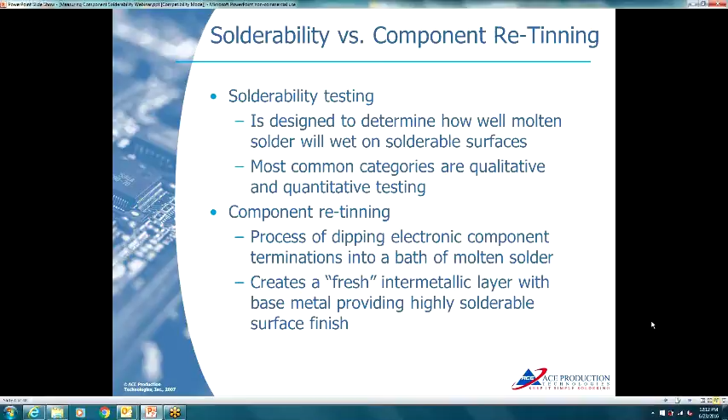Component retinning, however, is not the same as testing. It is the process of dipping electronic component terminations in a bath of molten solder. In addition to providing a fresh intermetallic layer of new virgin solder over the base metal, it removes oxides, removes gold, and provides a highly solderable surface. So they're two different issues.

So again, people ask, what is solderability testing? It is not component preconditioning. We've seen cases where people buy a solderability tester and attempt to use it for component reconditioning or tinning. That is not the case - you wouldn't do it because it has a single static solder pot. Anything you remove, oxides, contaminants, gold, etc., stays within that solder, and it's not flowing. It's a static pot, so it's not recommended for component conditioning.

Solderability testing is a measure of the ease at which a solder joint can be formed. It's primarily used to assess the solderability of device package terminations. For example, if you're getting a component from 2 or 3 different vendors, it's a good idea to do periodic testing during qualification to determine which vendor is shipping you the most highly solderable components.

Solderability for a given component will vary depending on the type of solder alloy you use. For example, solderability with lead-free alloys, whether SAC 305 or SN100, differs significantly from solderability when using lead-based alloys, because lead, even though it's a bad material, tends to wet very easily.

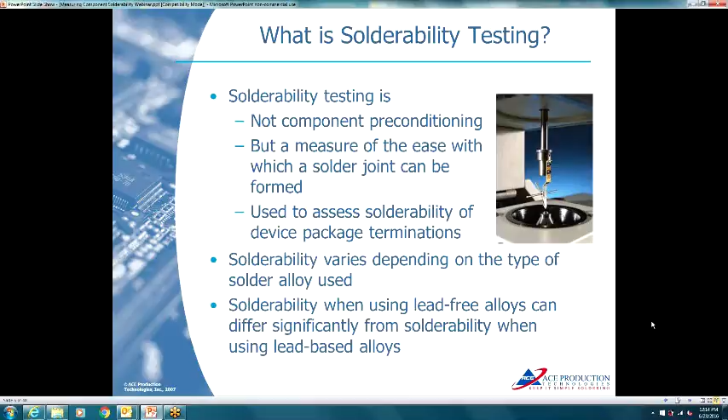There are primarily two different solderability test methods: the dip and look method and the wetting balance method. We had questions in the first session today about which one is better. The answer is they're two different things for two different purposes. The dip and look method is a qualitative type - it's subjective versus comparative analysis. We'll show you some examples in upcoming slides.

There are 2 suppliers of dip and look test equipment. Wetting balance is a quantitative type test where you have a test instrument that gives you a plot, and a human being interprets that plot, much like an X-ray. You have a beautiful 2D X-ray system that gives you a great image, controlling kilovolts, power, and oblique angle view, but it comes down to a human being interpreting that image, or in this case, interpreting the curve.

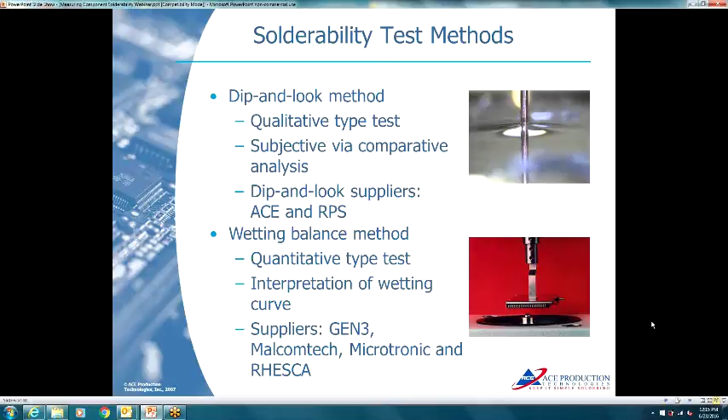There are several suppliers of wetting balance systems - we'll talk about it later. There's a place for both of them.

For solderability testing, you can use steam aging for accelerated life testing. If you want to simulate, for example, what happens if you keep parts on the shelf for 5 years or longer, it's a good idea to use steam age testing. It simulates accelerated life - we've seen people with components sitting on the shelf as long as 15 years for end-of-life builds, so the concern there is the degree of oxidation.

The dip and look method, as mentioned earlier, is subjective via comparative analysis. But let's talk about the difference between dip and look and wetting balance. Dip and look testers are typically lower in cost, about 15 to 16K. They're relatively fast and easy to do. It is subjective, but it can be done on the shop floor by shop floor personnel.

So it's something like doing an AQL. If you want to do a quick test on your production, a dip and look method is great for that. The wetting balance tester provides a much more precise test.

It measures the wetting forces between the molten solder and the test specimen as a function of time. Cost is a little more, about 55 to 60K, and it needs a skilled technician to do it in the lab environment. It takes maybe about 45 minutes or so to really do a good wetting balance test, so it's not something you're going to do out on the shop floor.

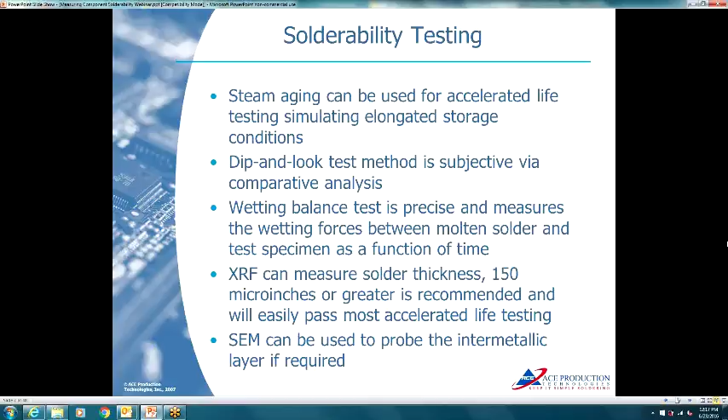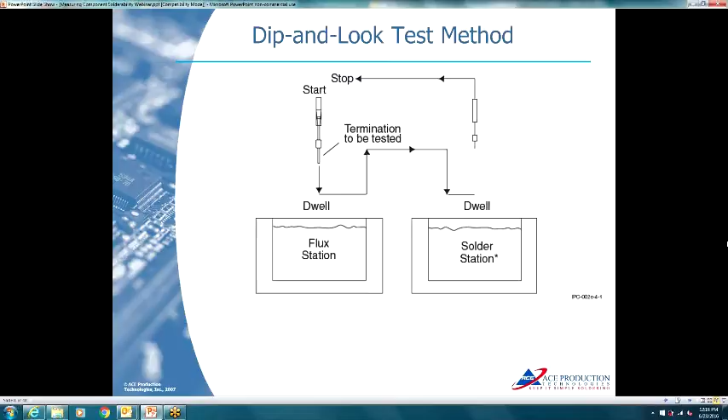This is how a dip and look test method functions. You basically take a specimen, and it's dipped into flux for a predetermined dwell time and immersion depth, and then you dip it into a molten solder bath, again for a predetermined dwell and immersion depth. After the specimen comes out, a human being looks at it.

It's a subjective test. The images on the left show the two that they accept - that's a condition where the solder has wetted at least 95% of, in this case, a .025 diameter pin, under 10x magnification. So you dip the part in the molten solder, and then the human being looks at whether it has 95% coverage.

The two images on the far left show more pinholes, and they're a reject because there's less than 95% coverage. So it's a subjective test, but it's very quick. You can do it very quickly on the shop floor, and basically shop floor personnel can do it.

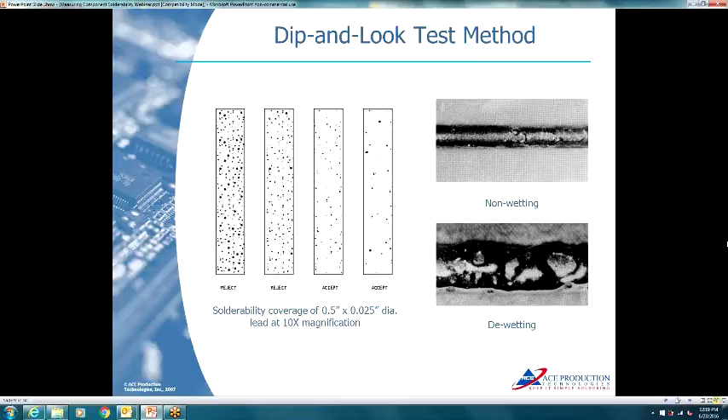You can also use 20 or 40x magnification, those images on the right. You can easily see non-wetting or de-wetted conditions. It's easier to do it here than after you build a circuit board or you're trying to solder a part that just won't solder and you're struggling with it. It's easier to determine if it's acceptable or not before you assemble a board.

The wetting balance test method is different in that, as we said, it's a little more complex to run, but it gives you a very precise reading.

The way it works is you dip a component in flux. The component is then attached to a device on a load cell, and the component is lowered into molten solder. What you're doing is measuring the buoyancy of the device - in other words, measuring the speed at which the solder meniscus climbs upward or flows on the body of the termination. Basically, the better the solderability, the faster it will rise up - the solder meniscus will rise up on the termination.

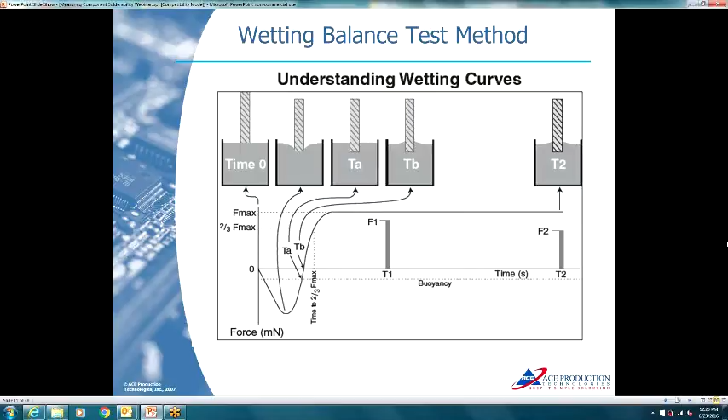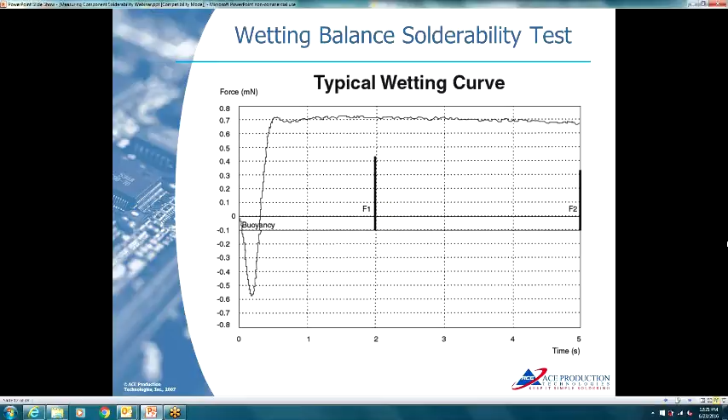Here's an example of using a wetting balance test to measure the difference before and after retinning. In other words, why do you need to tin parts? Parts are retinned for a variety of reasons: to remove oxides, to remove contaminants, to remove the gold. This was an actual case where it was a specialized component and the client could not solder in the circuit board. I don't know if it was hand soldered or machine soldered, they just couldn't get it to solder.

And it was from an offshore supplier, and the pins of the part were tested. You see in blue that plot was done before retinning, and you can see that it was very slow. The meniscus rose very slowly, very slowly to get back up to neutral buoyancy. That was a slow wetting curve, basically a slow or retarded wetting situation. That would be a case where it would be very difficult to solder that part in the board, if at all.

That component, we took I think it was 10 or 20 samples, retinned them, basically stripped off the original plating or tinning that came from the component supplier, put a new fresh coat of solder on, and did a second wetting balance test. You can see the line in black, the meniscus rose very quickly. You can see the before and after difference, the advantage of retinning a part as far as solderability.

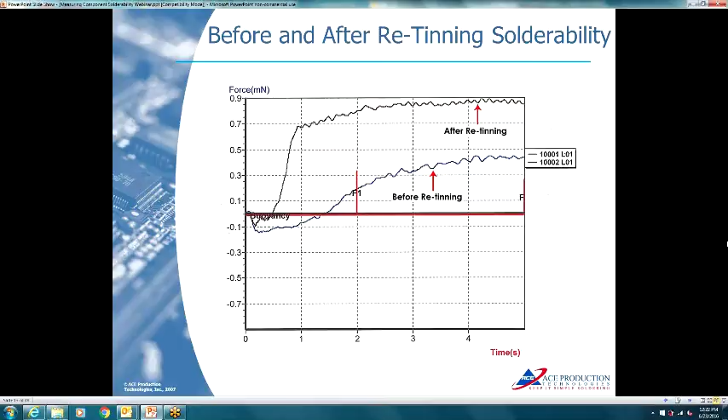There are several solderability test methods, however the MIL standard 883 and the J standard 002 are the most common. There are others, some may apply to you, some may not, but the top two are the most common in use.

What's the motivation behind lead tinning or retinning? It's really improved reliability. With the new REV-F, there is a big need to do removal of gold plating, sometimes referred to as gold washing, to remove the gold. Also for tin whisker mitigation, which is a major concern for military or aerospace manufacturers. The other advantage of retinning or lead tinning is enhanced solderability, producing a homogeneous intermetallic layer with the base metal or the component lead or termination.

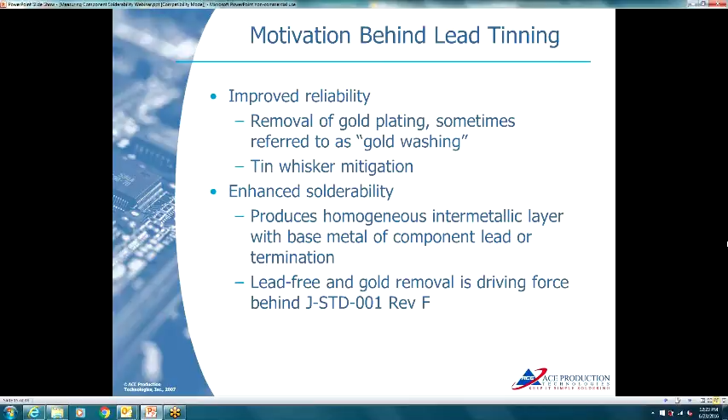If you look at it, what was the driving force behind the change from REV-E to F? It was lead-free and gold removal, and we'll show you some other slides coming up.

Tin whiskers, I'm not going to dwell on it a long time, but it's well known that tin whisker growth is predominantly outward from the plated surfaces. That's why tin plating is typically not good in certain harsh environments. Tin whiskers can and do cause short circuits and arcing.

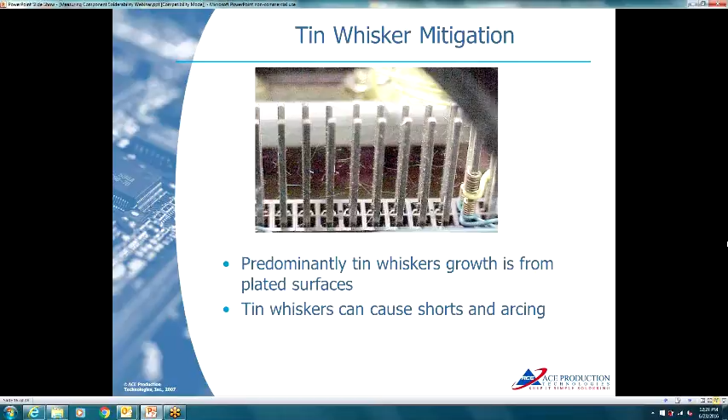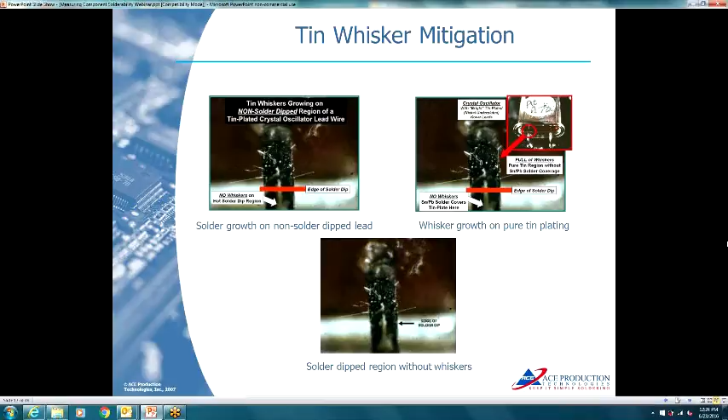Here's some graphic difference on a crystal oscillator. It's a little hard to tell, but if you look at the red horizontal line, these parts were retinned. Below the line is where they were retinned, and you can see no tin whiskers, and you can see tin whisker growth above it where they were not immersed. The pin was not immersed in solder. You can see it a little bit better on the bottom image, that once you solder dip, remove the tin plating and replace it with a homogeneous tin lead plating, you can see there is no growth of tin whiskers.

As we mentioned, gold embrittlement, gold removal is a very hot topic now, especially because of the new REV-F with the J standard 001. Gold plating has been used a long time in the industry because it protects device termination through the harsh, high reliability qualification process. However, the issue is gold in a solder joint can create gold embrittlement.

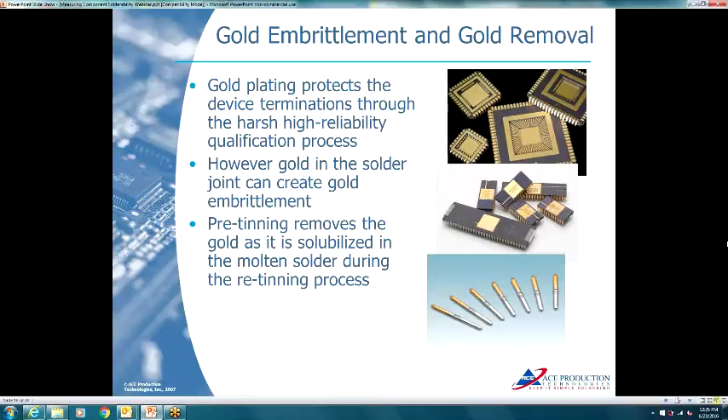Pre-tinning or retinning removes gold as it's solubilized in the molten solder of the first of two solder pots. In other words, it's removed in the first pot, and then the component or the termination is retinned in the second pot. We'll show you that in another slide coming up.

So why is gold used in the first place? Well, immersion gold over a copper base metal is highly resistant to the effects of corrosion. Gold is not oxidized and provides a very good protective layer over base metal.

It provides a highly solderable surface, and the reason device manufacturers like it, the gold provides a very bondable surface for both gold and aluminum wire bonding. However, the inclusion of gold in a solder joint can result in gold embrittlement because that gold is going to be combined with other metals within that solder joint. So it's good for bonding and assembling the device, but when you get to the circuit board level, excessive amount of gold is not a good thing to have.

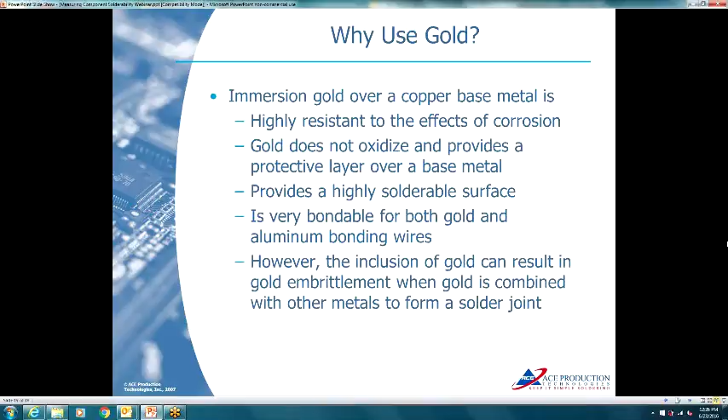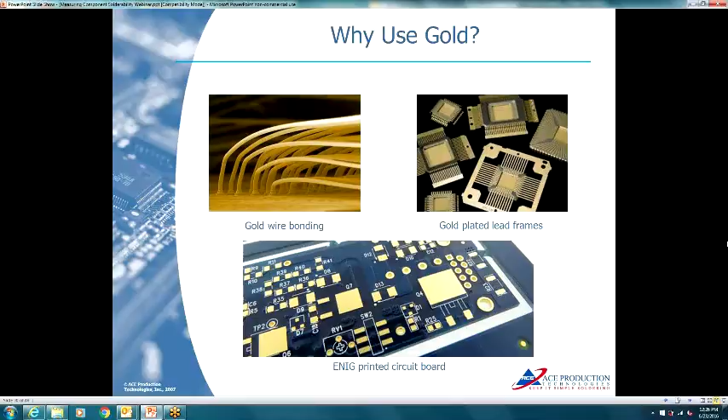So here again is some other examples of why gold is being used. It's very good for gold wire bonding, gold-plated lead frames, and we see gold in plating boards. So that's nice, but we have to remember that once we get to the pinout stage, where we're assembling the board, assembling the device on the circuit board, gold has to be controlled to stay below a certain level.

So gold embrittlement has been known to be a failure mechanism in tin lead for some time. Again, it's the amount of gold that is a concern, and that amount of gold comes from a variety of sources.

You can be concerned if you have ENIG boards, depending on the amount of electroless nickel immersion gold. That gold is a contributing factor to gold amount. Studies have shown that SAC 305 tends to maintain its proper mechanical properties a little bit better than tin-lead, primarily because of the additional tin content. However, SAC 305 solder joints do degrade with increased gold content.

There have been all sorts of independent studies done, and the key question is what's the threshold, the maximum amount of gold? As we said, there does not appear to be a threshold - it's acceptable, unacceptable, good and bad. There's been a debate within the industry: is 3% gold by weight the limit? Is it 5%? The agreed-upon decision was 3% gold by weight as the maximum level within a solder joint. However, some people have seen gold embrittlement with gold levels as low as 1 or 2%. So it's a topic of high debate.

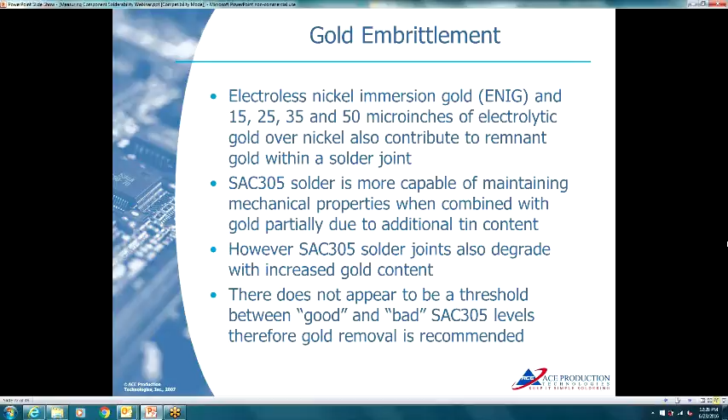You want to stay below 5% gold by weight, and as device pitch gets smaller and smaller, those solder joints get smaller and smaller, the amount of gold is going to increase because the total volume of the solder joint is decreased.

What's the reason behind gold removal? For high-rel applications, solderability is no longer an option for many high-rel segments - not only Class 3, not only military, aerospace, or wellhead electronics, but also Class 2. With the implementation of the new Rev F of J Standard 001, solderability testing, gold removal, and component retinning have become prerequisites for doing business in the global marketplace. It's becoming more and more known.

As we've found going across the industry - not trying to categorize everybody into one or two groups, but we've seen quite a few companies that fall into these categories - many manufacturers of commercial electronics feel that Class 2 products aren't affected by Rev F of J Standard 001. They don't realize that the new Rev F does affect them, and therefore don't realize the reason for gold removal. People are becoming more aware of that. I believe Rev F was issued about a year and a half ago, and it's now just starting to become more in the forefront.

People in the military aerospace industry - many are doing things correctly. However, traveling around the country, we've seen many in the military aerospace industry that are still living in the 80s, relying on MIL 883 and unaware of the newer standard. We've seen many military aerospace OEMs still using single or static solder pots, dipping parts with tweezers. That's not a good way - you are not doing gold removal, you're relieving those gold material contaminants and oxides into that pot for the next time you apply solder. We'll show you other slides on that.

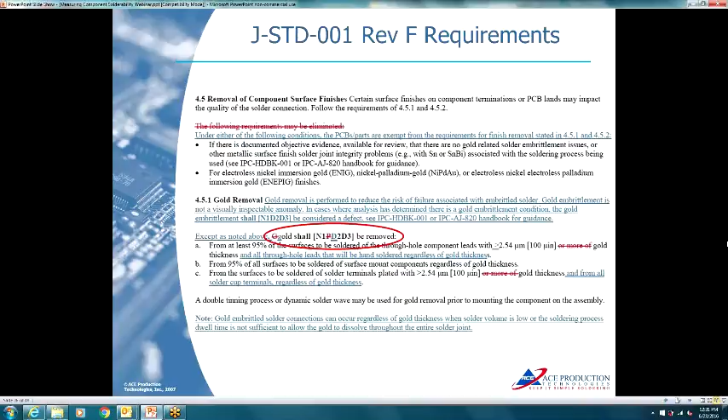This is an excerpt right from the IPC standard that was issued in 2014, and these are just the defect codes. N is no requirement, not applicable. A is acceptable. P is process indicator. D is defect. You'll notice in the examples it varies depending on if it's Class 1, Class 2, or Class 3. What many people sort of glossed over was that with Rev F, gold removal is not applicable to Class 1, but it formerly was a process indicator for Class 2 products - it's now a defect for Class 2. It always was a defect for Class 3. So the point is gold removal does now affect Class 2 products as well.

The J Standard 001 Rev F basically states that at least 90% gold should be removed from at least 95% of surfaces on all components that have more than 100 microinches of gold thickness. You have to remove gold from 95% of the surfaces on all surface mount parts, regardless of gold thickness. You may ask yourself, how do you remove 95% of gold? The answer is you remove it all - you dip it and remove all of the gold. Some people debate whether you have 100 microinches, whether you have 80, whether you have 120.

On surface mount, you have to remove gold on all components, regardless of thickness. On through hole, there's a debate whether you want to follow the spec, which says anything more than 100 microinches. We're seeing people removing it on all through hole regardless of thickness as well. You should remove it on all solder terminations, again anything more than 100 microinches. A double tinning process or dynamic solder wave is required to remove gold, and we'll show you that in a couple of upcoming slides. Improper gold removal on leads and terminations prior to assembly can lead to solder cracks or failures.

For those of you doing end-of-life builds, we've seen customers who have legacy parts that have been sitting on the shelf up to 15 years. A lot of those are obsolete parts that come through distribution, and they are very heavily oxidized. They have to be retinned just to remove the amount of oxides, not necessarily for gold removal, but because they are so heavily oxidized and result in sunken solder joints, non-wetting, de-wetting.

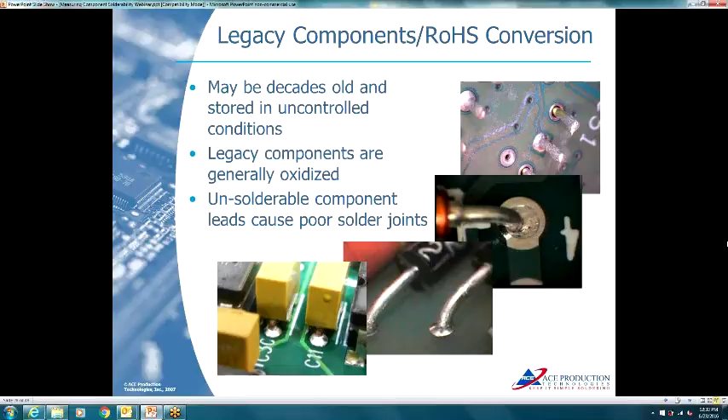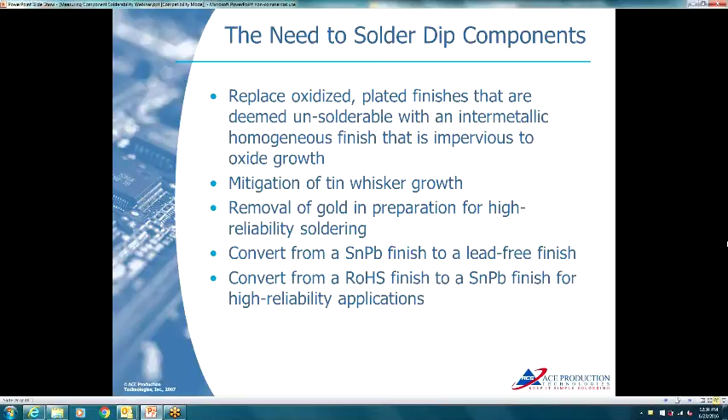So again, the need to solder dip components: you want to replace oxidized, heavily oxidized plated finishes that are unsolderable with an intermetallic homogeneous finish that's going to be impervious to oxide growth. You want to eliminate or mitigate tin whiskers. You want to remove gold in preparation for high rel soldering, and you can argue that it's high rel in class 2. You can also solder dip components to convert a tin lead to a lead free. We're not seeing a lot of people doing that, but it can be done. We are seeing quite a few people convert RoHS parts to a tin lead finish for high rel applications, and the next slide illustrates that quite well.

This is a view of the global supply chain, and we know we're living in a lead-free world. If you look out several years, the estimate is that tin lead parts are going to be down to 1 or 2% of the mainstream. So if you're in military aerospace and you cannot use lead-free parts, the answer is you're going to have to retin them to remove the RoHS or lead-free finish and put on tin lead. The bottom chart shows you a breakdown of what is being retinned, and you'll notice the largest sector is lead frames. That's primarily because those device manufacturers very much want gold plating because it helps them with bondability, but now the gold has to be removed off the lead frame before board level assembly.

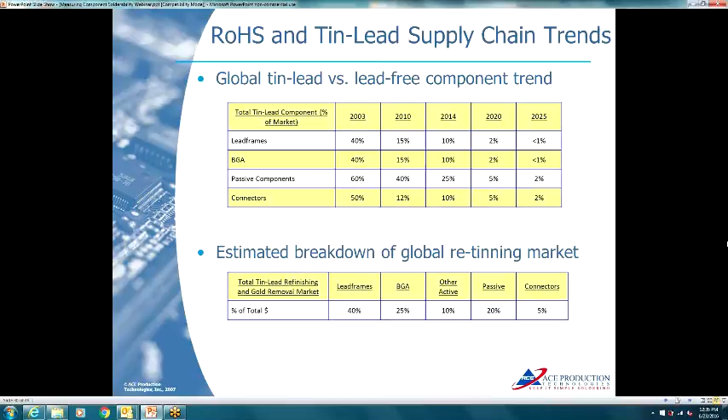The GEIA-STD-0006 standard requirement states that robotic and semi-automatic solder dipping apparatus shall have controlled dwell time and depth of immersion, exit speed. Piece parts should be preheated to greater than 71 degrees C prior to solder dipping. Molten solder contact shall not exceed 2 seconds for the J standard 001 space addendum. Again, total immersion time should be less than 5 seconds per side, basically at all times.

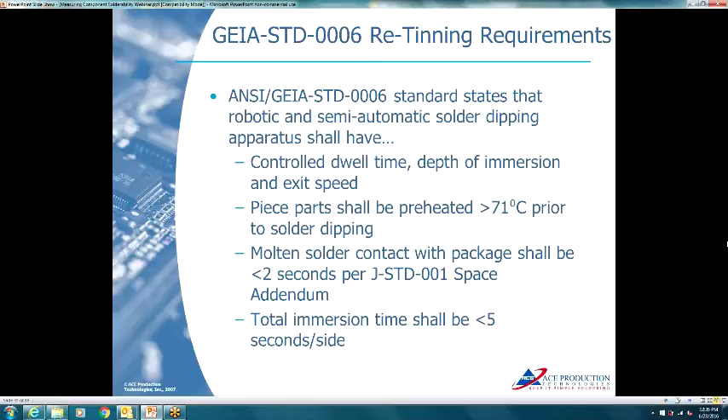I wouldn't exceed 5. To achieve an intermetallic when you're doing retinning, we recommend that you test the component solderability with a wetting balance tester before you even do solder tinning. It's a good idea to know what that part is like before you tin it. As a matter of practice, we measure the solderability before and after we do any retinning. You may have to pre-clean suspected components, remove organics and excessive oxides. We have seen quite a few connectors that have mold release on them, and you have to remove that prior to retinning because it's an organic compound. You need to use a flux that's specific to the component lead and termination finish.

Preheating is generally required, and we show that in a slide coming up. It's recommended to use a 2-pot system where the first pot will scrub or remove the unwanted plating, gold, or oxides. You want to keep all that material, the oxide, the gold, etc., in the first pot and not pollute the second pot. The second pot is used to apply a pure alloy finish coat, and you need to control the solder immersion speed, the depth, and extraction speed.

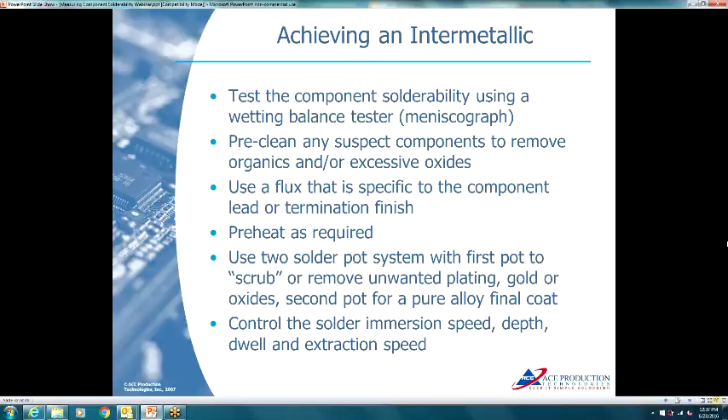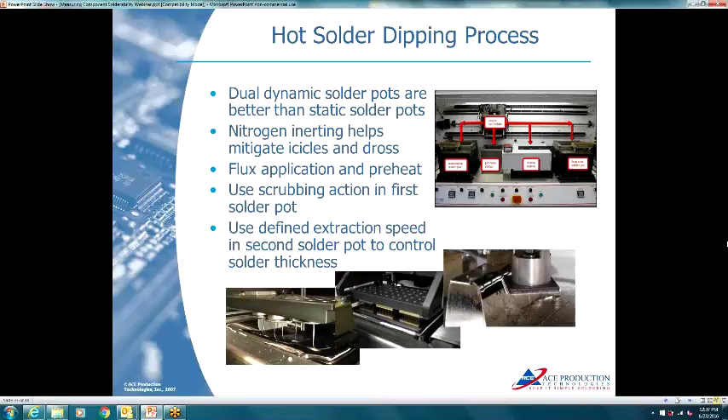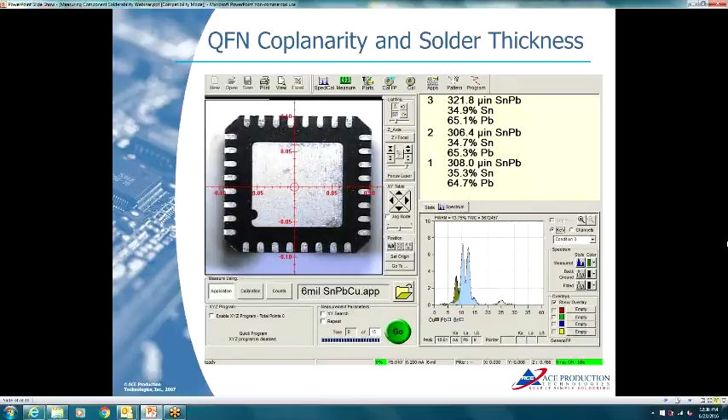When you're retinning QFNs, coplanarity can become an issue. You can see by looking at the bottom view this large central grounding pad in the middle, and there's always a tendency for the meniscus to form quite high on that grounding pad versus the individual terminations. So you have to watch that very carefully when you're retinning QFNs.

QFPs can be retinned down to 6 by 6 millimeters, as large as 50 by 50. There's a video coming up that shows that. We can retin QFPs down to 12 mil pitch with bridge-free results.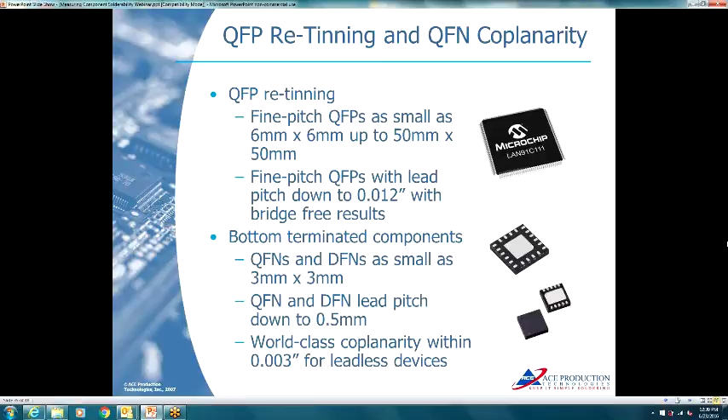Bottom terminated components such as QFNs and DFNs can be retinned down to 3 by 3 millimeter with a lead pitch down to 0.5 millimeter. The key is on those small QFNs, that central grounding pad - there's always a tendency for a solder meniscus to be higher there because we can't change physics. We're able to control world-class coplanarity of 3 thousandths. Again, it's just the physics of molten solder on that grounding pad.

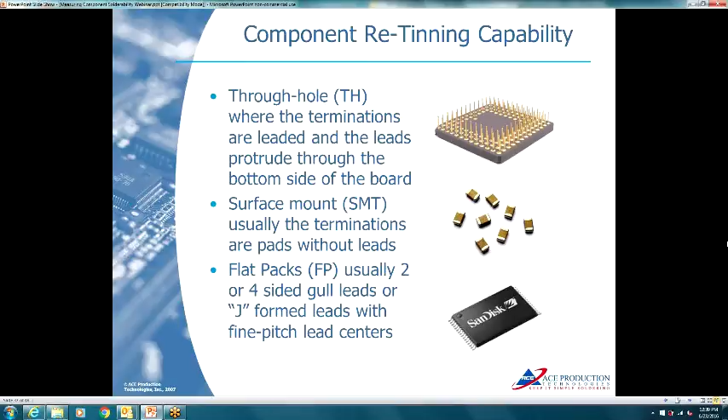Component retinning, you can pretty much do any through hole part. Here's an example of pin grid array. Surface mount parts, we can go down to an 0402. Pretty much any surface mount part, leadless part, can be soldered, retinned rather. Flat packs, such as a T-SOP, again can be down to 12 mil pitch and retinned. Any through hole component that you can fixture or grip, you can retin.

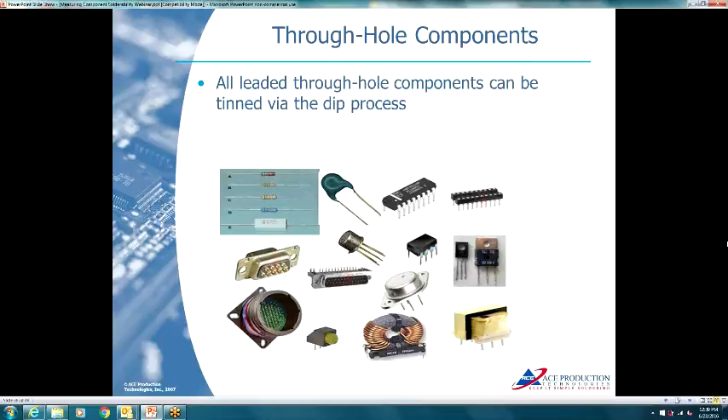Large special components need some fixturing, but that's easy to do. Surface mount parts, whether LLCs, PLCCs, chips, SOTs, anything can be done, again with fixturing. Fixturing is critical because you're going to retin maybe 10, 20, 100 components at a time, and you need to maintain parallelism with the molten solder bath, just as you do in a wave machine. You need to control the immersion depth and extraction speed, so you have to fixture those parts to have consistency.

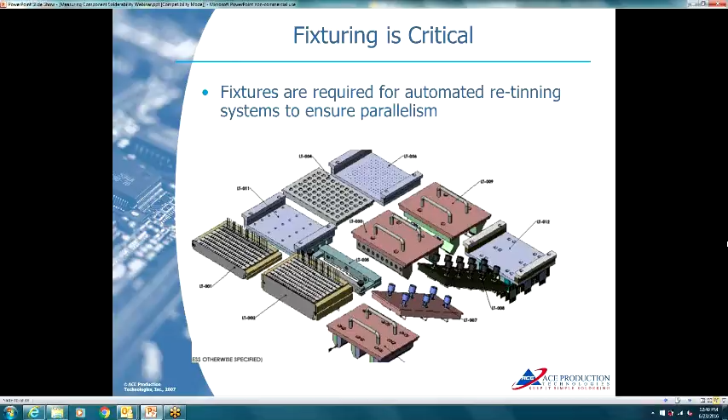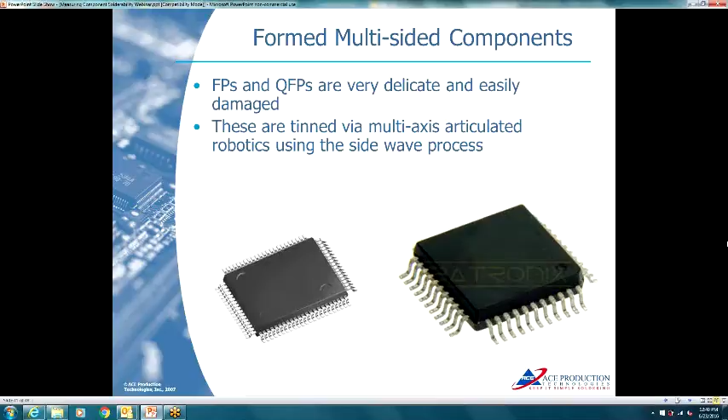Multi-sided parts like QFPs need to be done with a multi-axis articulated robot because you have to get all four sides, and they're somewhat delicate - can't damage them. This is a video, I hope it's not too grainy.

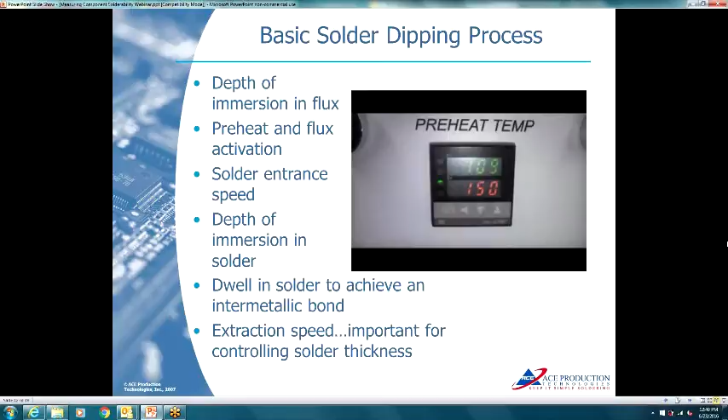This is retinning a through-hole part where a part is fluxed and then there's hot air convection preheat. You're soldering, retinning several parts at once. You control the depth of immersion in the flux. The preheating is controlled, as is the solder entrance speed.

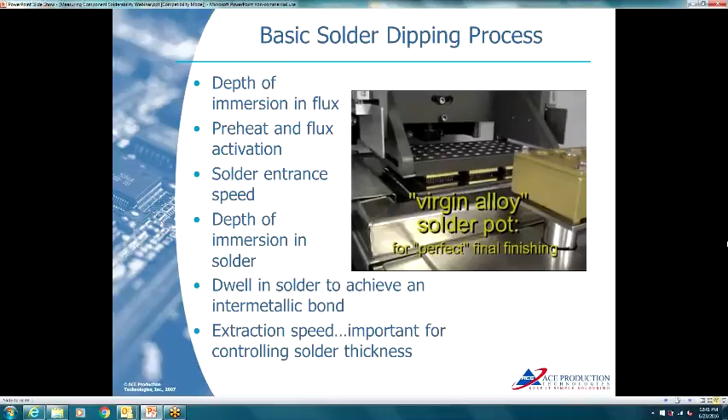Here the components are being put in the first, or scavenging, pot. You'll notice there's aggressive movement in there, and that's to remove all the gold or oxides. Then the parts are refluxed and go into a second pot. You'll see a drag skimmer removing the top materials, and you'll notice very carefully when the parts are extracted that the extraction speed is controlled very accurately. You can see that little hesitation there - that's what controls the solder thickness.

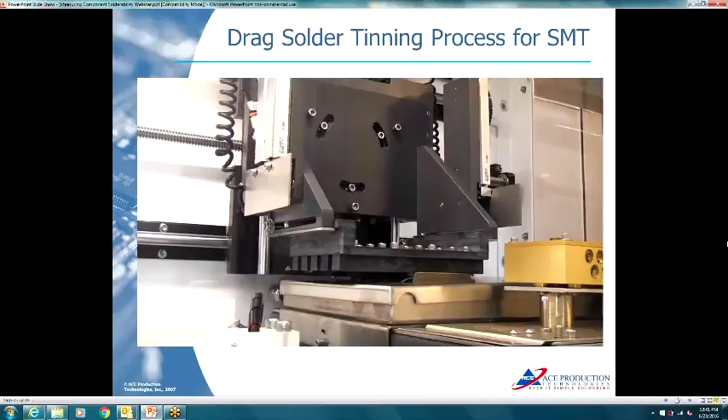This is a drag solder operation that's used to retin several surface mount components. We're just showing an example of tinning several at once. In a production environment, you'd have the entire fixture filled - this is just partially filled.

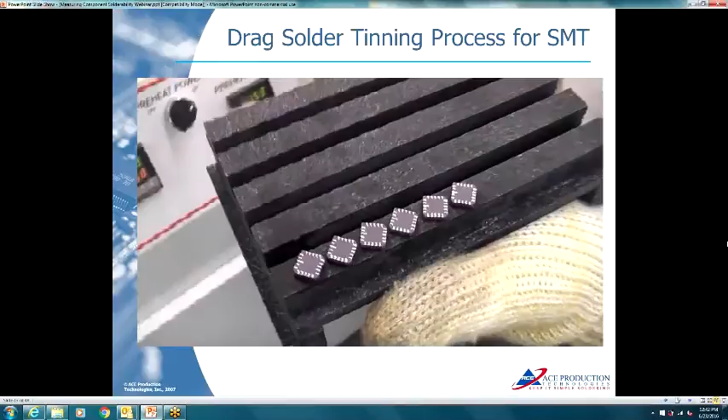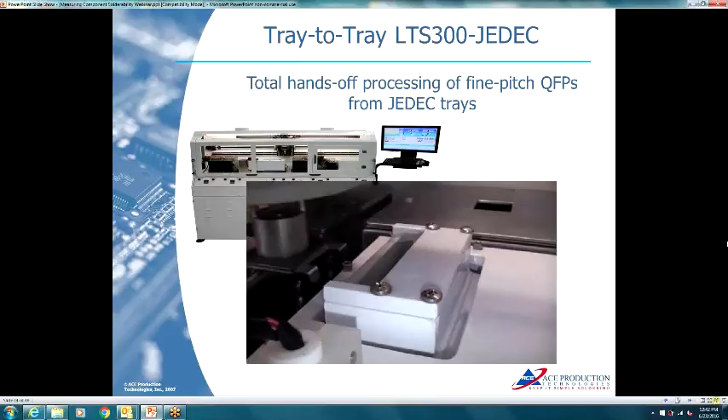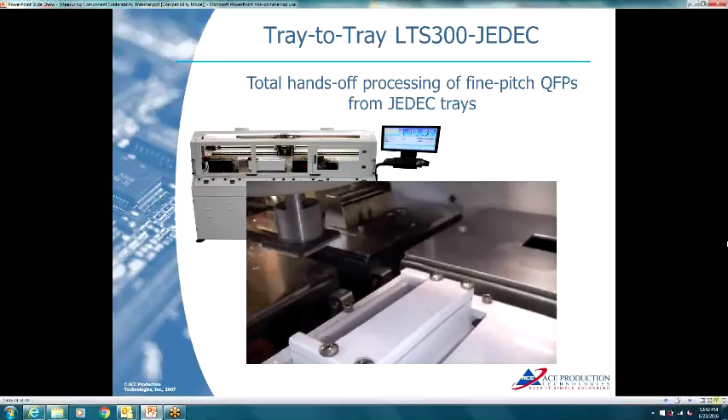Here's an example of retinning fine pitch QFPs. They're pulled out of a JEDEC tray after they have to be fluxed and preheated. You have to flux each of the sides individually without touching the flux to the plastic body, so you have to rotate and articulate it. The part is then heated with convection reflow, and you'll notice you have to solder dip each side and pull away on an angle to minimize bridging. It's a very delicate operation. We can go down to 12 mil pitch.

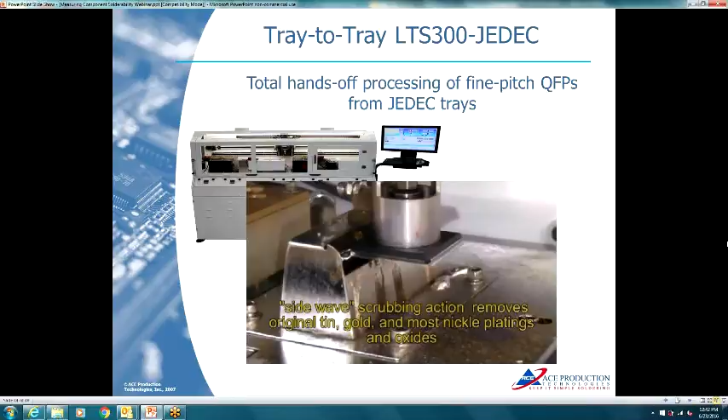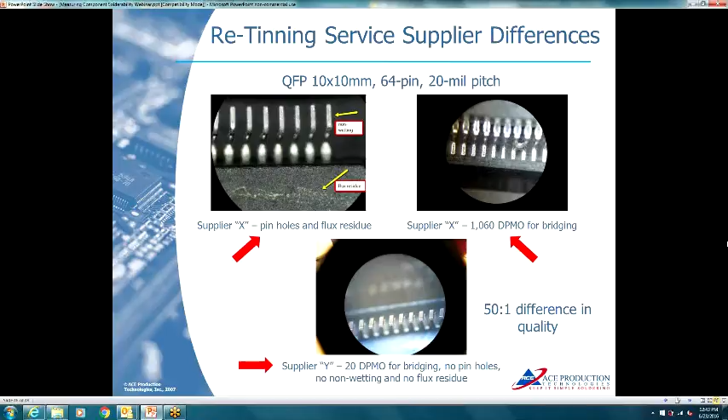What's interesting is there's a difference between retinning suppliers. This is an example of a 64-pin, 20 mil pitch QFP done in relatively high volume - say 1,000 plus per week on an ongoing basis. You can see the difference between two different service suppliers: one has pinholes and residues, and there's a significant difference in defects per million opportunities in bridging between the two suppliers. And that's it, Bob.